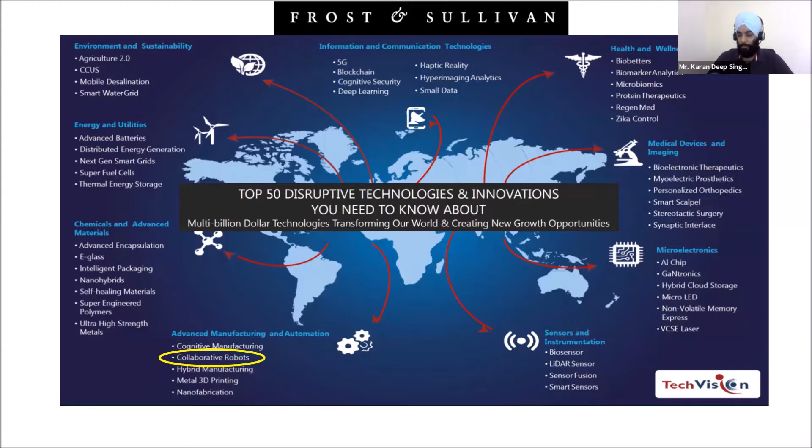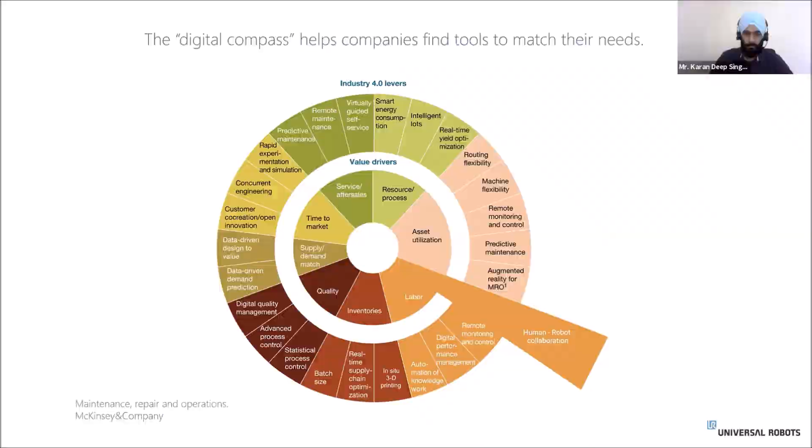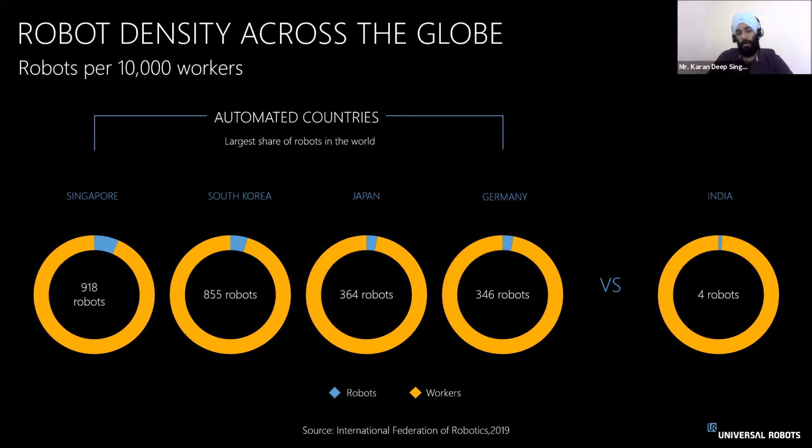South Korea is 855, Japan with 364, and Germany with 346. But if you compare with the India manufacturing scenario, it's only 4 robots per 10,000 workers. So we are way behind in the implementation of industrial robots or collaborative robots. But now governments are giving initiative to AI and robotics, and maybe in coming years this number will increase significantly, and manufacturing facilities can make use of more robots and cobots together to meet the demands of manufacturing.

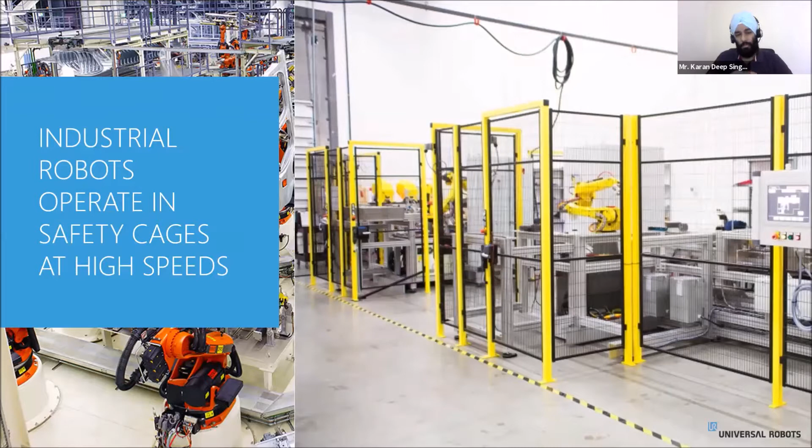There are two slides which are very important here. If you see industrial robots, they work inside cages. If you want to change something inside the cell, you have to open the door, go inside, and stop the line, which will ultimately reduce production. It will halt production, and at the end of the day, you will not be able to meet customer demands.

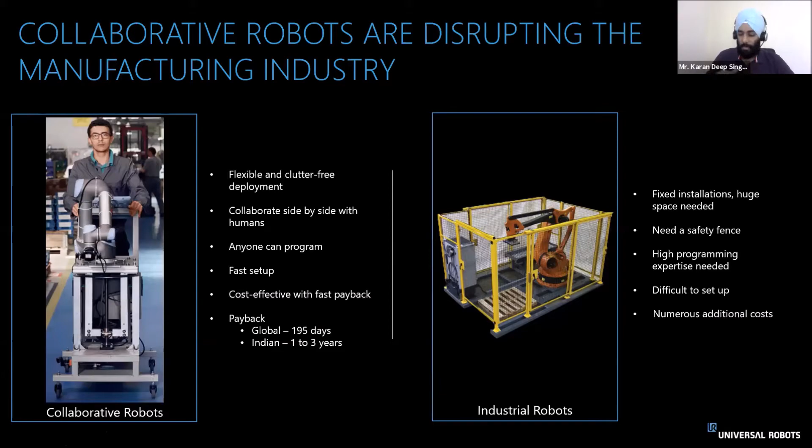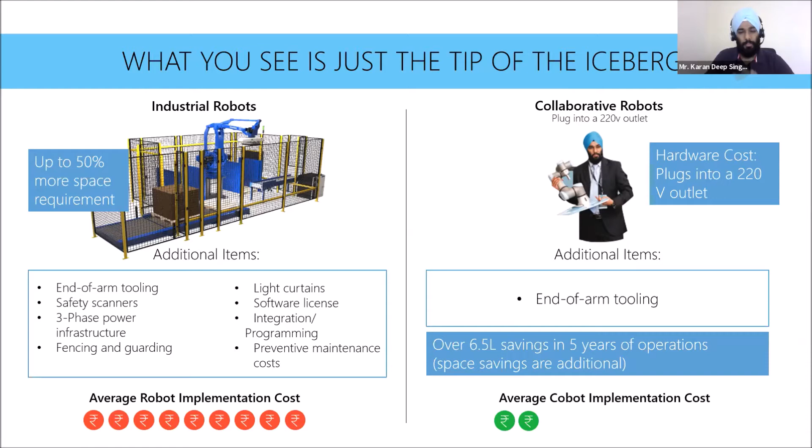Only thing what we sell is the extended warranty for maximum 4 years. So end customers can buy extended warranty for 4 years in one shot. If they buy a robot today, they can buy a 4-year warranty, or they can buy every year before the expiry of the current warranty terms. So this is our offering in terms of the commercial point of view.

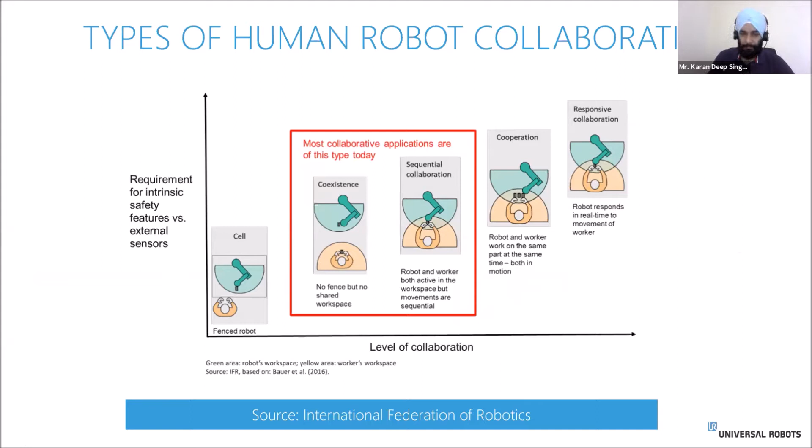This is a standard designed by ISO, technical specification 15066, which states that anyone making a collaborative robot can have any of the safety features: a safety-rated monitored stop, hand guiding, speed and separation monitoring, and power and force limiting.

But in UR cobots, these 4 features are available by default. You can use them as and when required. Power and force limiting is inherent in the design, meaning that if you apply any external force, whether from a human operator or another device like a conveyor, it drops the current in the system and stops. So without damaging parts or hurting the operator, it's safe to operate without cages.

There is a whole document on this, a 30-page document which you can download from the ISO website, where you can learn more about this technical specification.

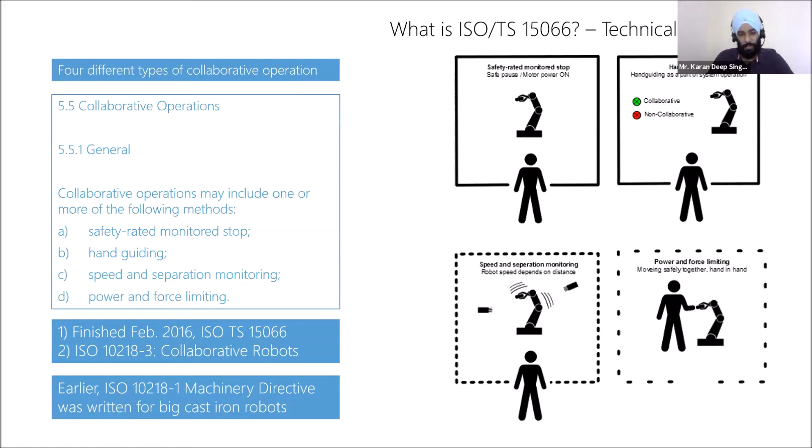On the product line, we sell 2 different product lines: the CB3 and the E-Series family, which we launched in 2018. The CB3 has 3 different models: UR3, UR5, and UR10. The numerical number signifies the payload capacity, meaning 3 kg, 5 kg, and 10 kg, each with different reach for operation. In the E-Series, we have 4 different models: 3E, 5E, 16E, and 10E.

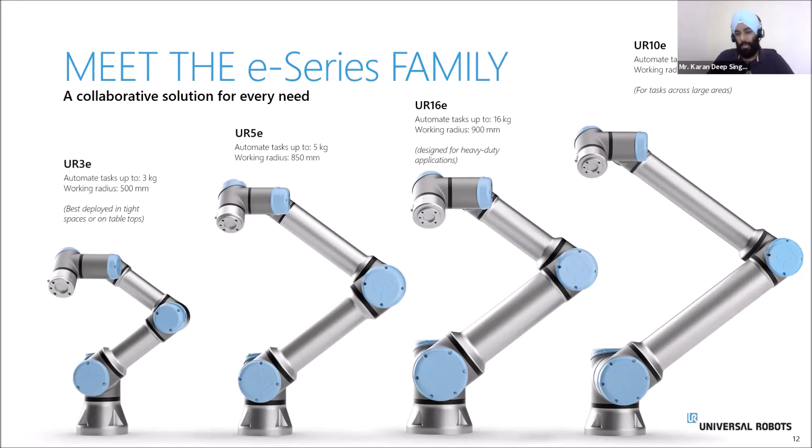You may wonder why we put 16E in between 5E and 10E, because of the reach. It's a simple phenomenon: if you reduce the arm length, you can lift a heavier product. The arm reach for the 16E is 900 mm, clearly designed for heavy duty applications which were not possible before. If you have a box of 11 or 12 kilograms, you were unable to lift it, but now with 16E you can do that heavy machine tending or heavy palletizing applications.

Industry 1.0 to 5.0: in the earlier years we had mechanical, water and steam engines. Then we moved to mass production and assembly lines. Then we came to robotic automation and computers. And now we are talking about Industry 4.0, which is putting everything on a network so we can collect everything on a digitized basis.

But what the company talks about is Industry 5.0, where we are giving human value creation, meaning humans and robots are working together. The next video, from BMW, will make clear how manufacturing is using collaborative robots on their assembly line.

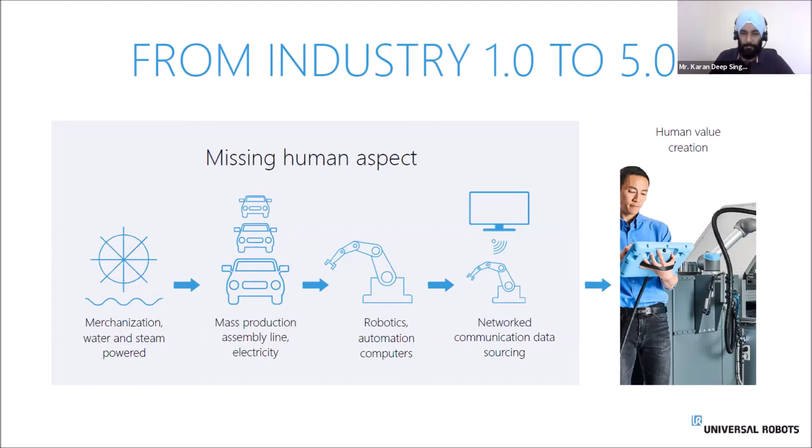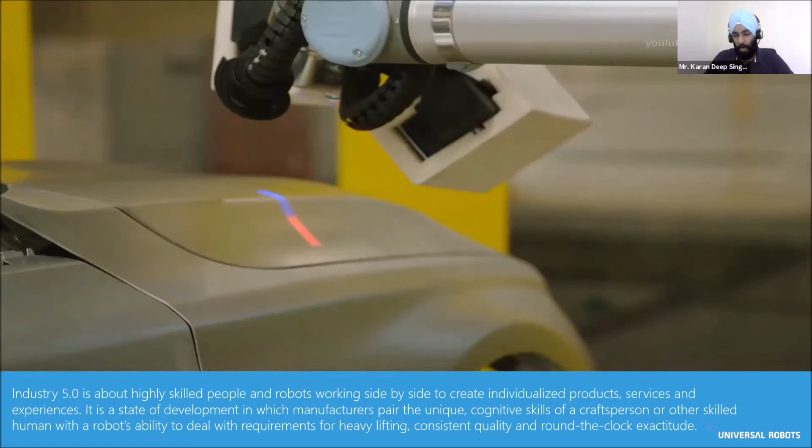It's a tool with competitive advantages through manufacturing excellence. Here you can see it's Industry 5.0, where highly skilled people are required and work with cobots side by side. There are 4 cobots, 2 on each side, doing gap inspection checking on a BMW car, and in between you can see there are no fences, just a laser camera on the robot. It's a UR10, and that's why BMW costs more, because they do a lot of high-end inspections.

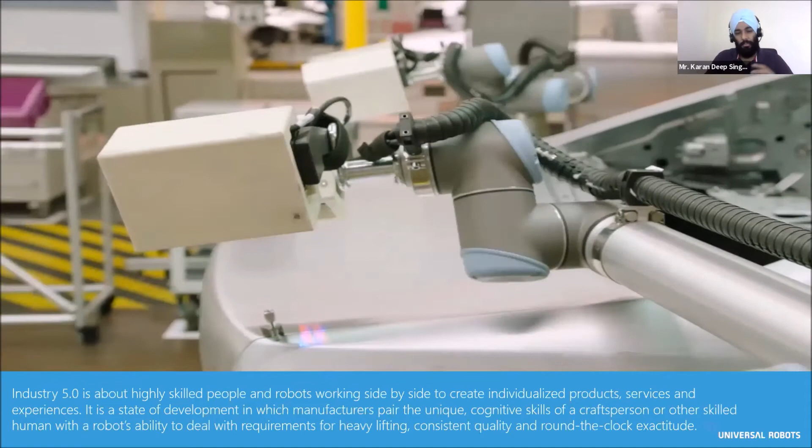You can see a human operator coming in between, doing their own checking without worrying about the collaborative robot working. You can increase the speed; it's running slow because it has to take the picture. When it's done, the data is recorded on the MIS system, and once the car gets all green signals, the next car will come. If it shows anything red, that car goes to rework and is then reloaded for inspection. Here you can see it's all green.

So now it goes for the painting application, the next process. This is how BMW uses it for gap inspection checking, and many other companies are also using it for the same applications.

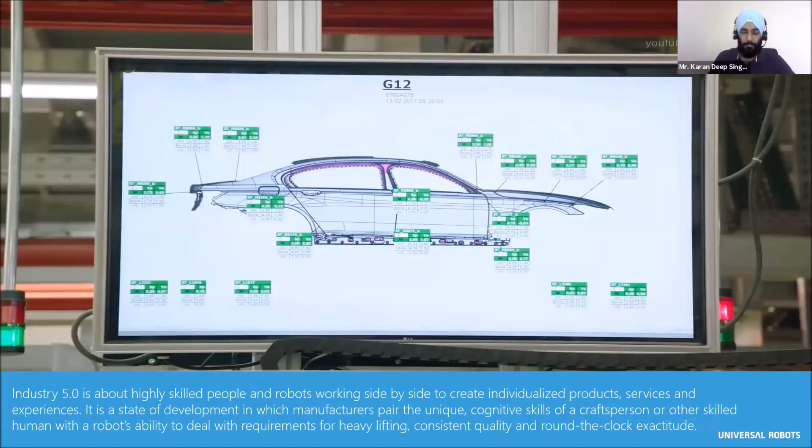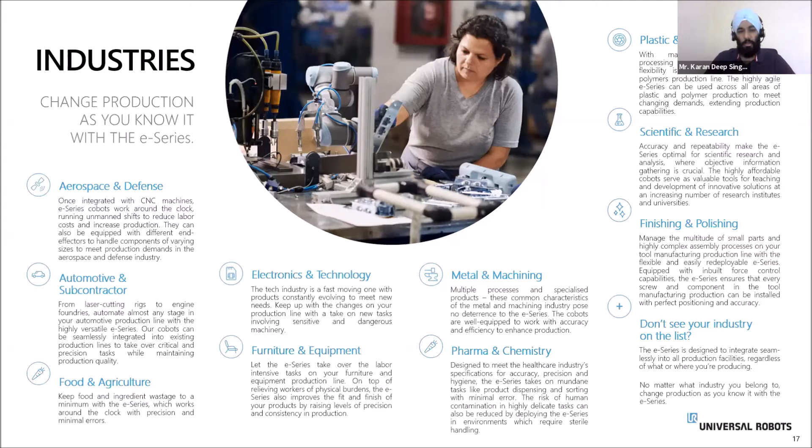So now we talk about Indian case stories. We have bigger clients like Aurolab. They are located in Madurai, which makes intraocular lenses. They installed the first collaborative robot in 2011. They saw it at one exhibition in India, and they deployed one cobot. Before the cobot, they were doing around 270 lenses per day, but today they are doing around 15,000 lenses per day. In 2011, they were supplying only to Aravind Eye Care Hospital in India, but now they are supplying to 150 countries all over the globe.

And they have brought down the cost of a European lens from 3,000 to 270 rupees by using collaborative robots. So they reduced the cost, enhanced the quality of the lens, and started exporting to 150 countries, which is a very great example of how collaborative robots are helping Indian manufacturers.

And this is not a profitable organization. It's a charitable, non-profit organization, and they are using 11 collaborative robots, which are working 24/7, delivering 15,000 lenses per day. This is how they are maintaining the quality.

And the girls who are working there, they are only 10th pass. They only work in Aurolab just before they get married. They just come there for work for some time, and still they are able to run it and program the system. It's so easy, which shows that you don't need a high-level programmer to program it.

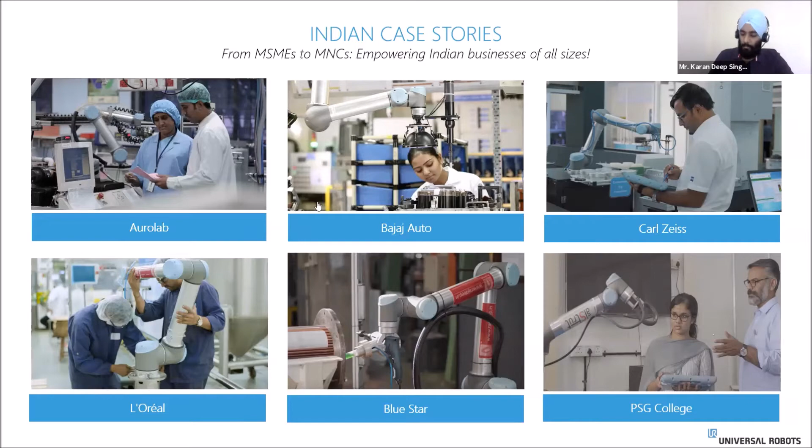On the SMEs front, we are enabling the Make in India dream. We have Shri Sai Makers, Markers and Engravers in Gurgaon. They are a very small company located in Gurgaon, which is supplying to an automotive company. We have SMEW, they make textile winding machines. Shruti Engineers is a 20 employee company, and they have a UR10, which is taking care of machine tending jobs.

Then we have New Engineering in Jamshedpur, and Udyam Dal. They are making dal. They are manufacturers in the agriculture business, and they have a pick and place robot for the packaging line.

Next video is from New Engineering. Audio is not there. You can hear the audio of the video. No. Not really. Okay, so this video is from New Engineering Works.

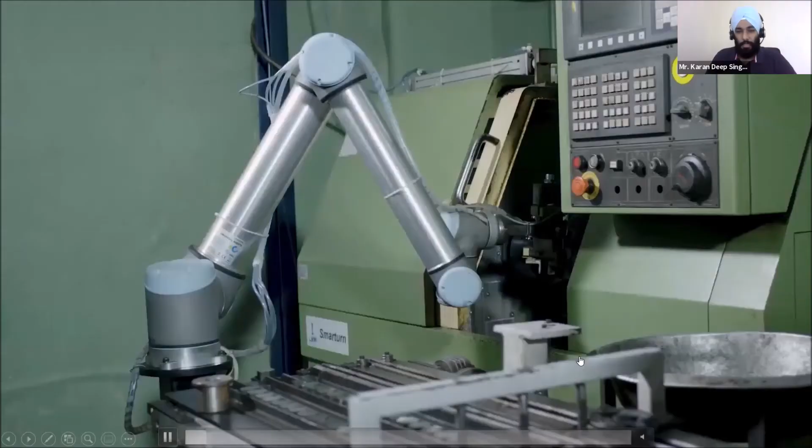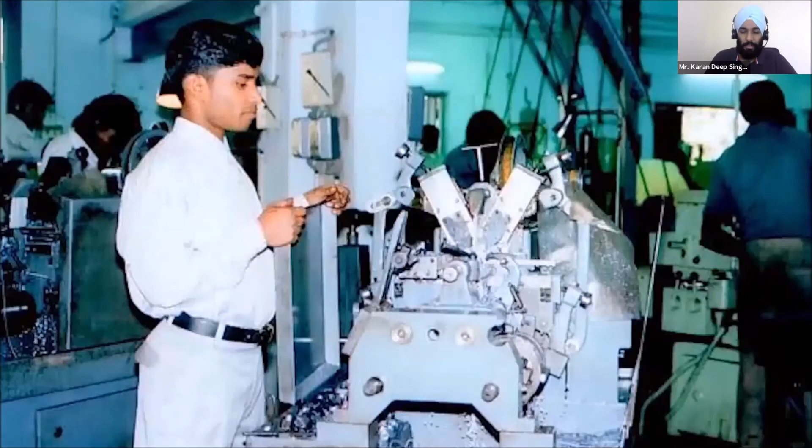They deployed 6 collaborative robots for small part handling. They started this, I think, around 2017 when they installed the first robot. Here the owner is talking that he bought this facility in 1996, and then he learned how to do the in and out of the production. And now they are the world-class manufacturers for Tata in Jamshedpur, and they do parts for commercial vehicles.

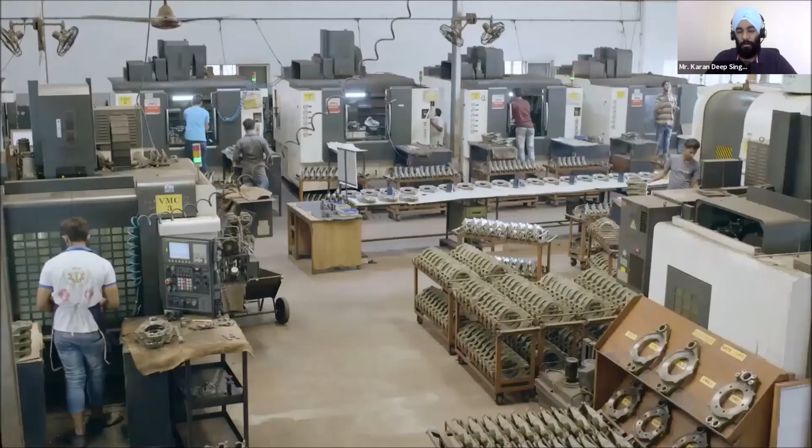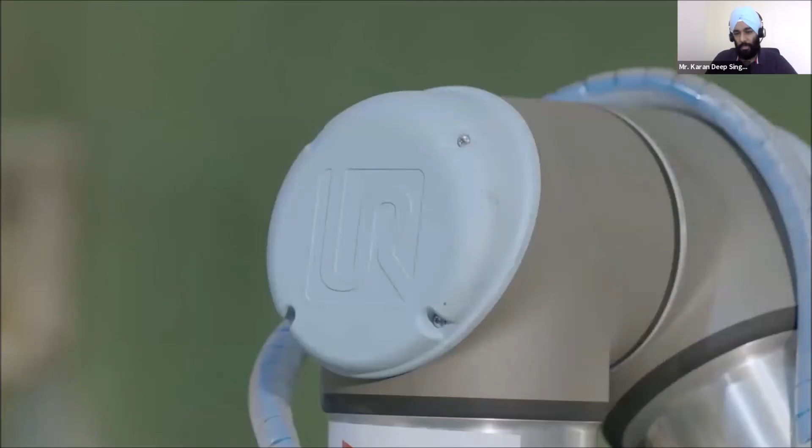And they have a lot of CNC machines, but he talks that if you want to achieve automation, you have to reduce the cost per component so that they can run the line 24/7. And he decided to go with Universal Robots for its lower footprint and easy to program handling.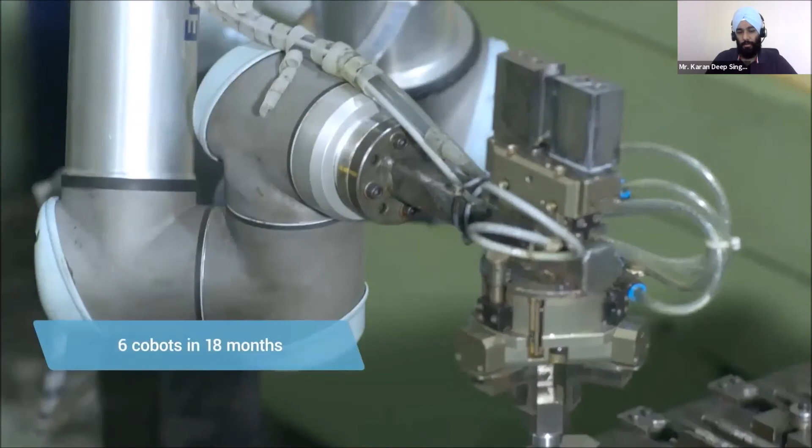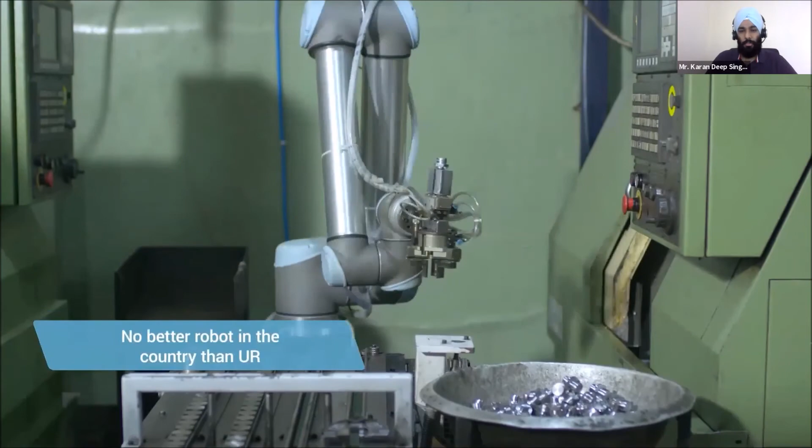And here the robot force works with their employees. As you can see, there are no fences around, and it takes care of 2 machines side by side. They're giving the inspection job of the product which is coming out of the machine. It's still handled by a human operator, and they did not remove a single operator from the line when they installed all the 6 cobots. The team is still there, the labor force is still there, but they upskill their labor performance, not just by loading and unloading, but they have given them inspection jobs and other value added things on the same shop floor.

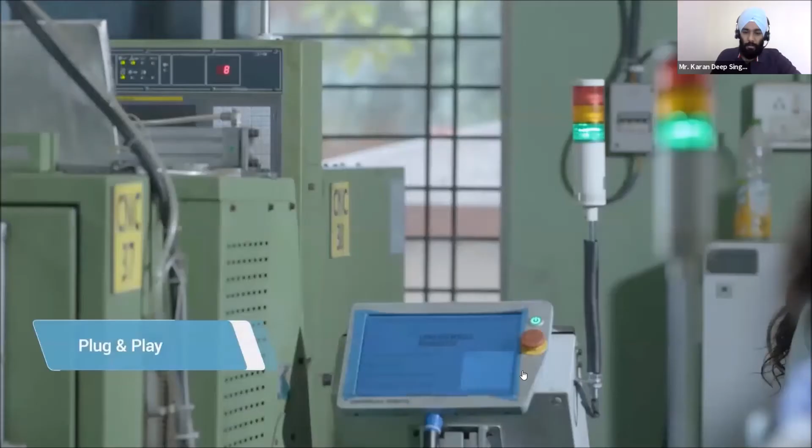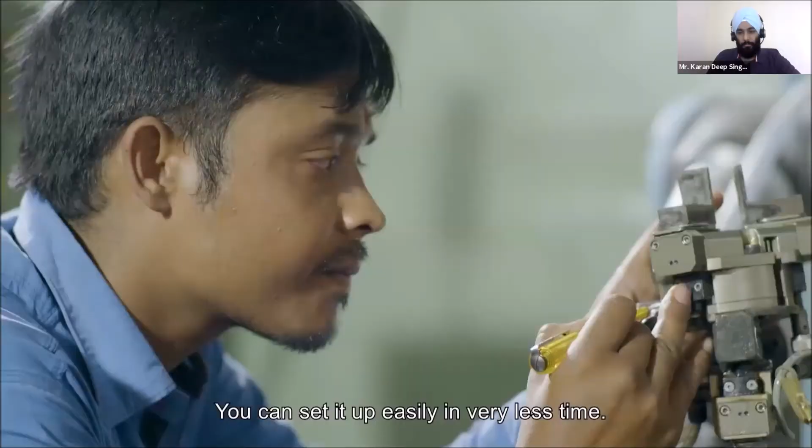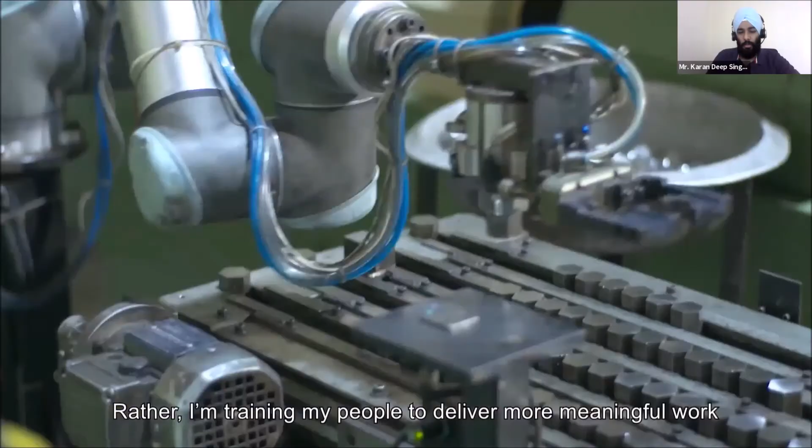It's as easy as using your smartphone for the operation. So he's saying that if we invest in robots today, he's not removing the labor, but they are moving the labor force to do CMM or inspection jobs. He can educate them so that the owner can explore more business.

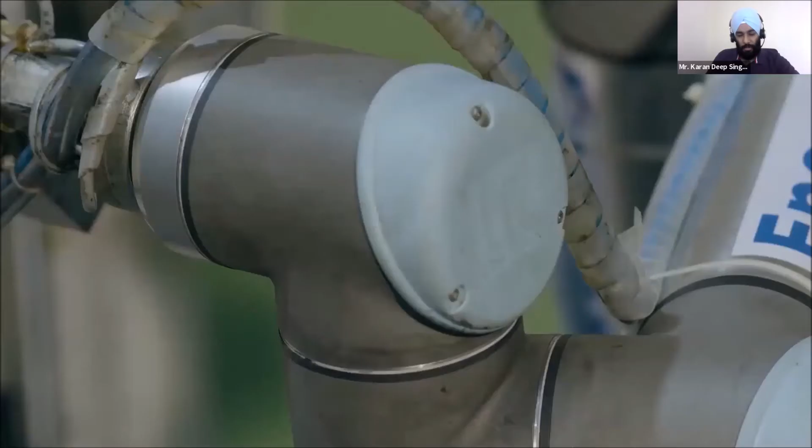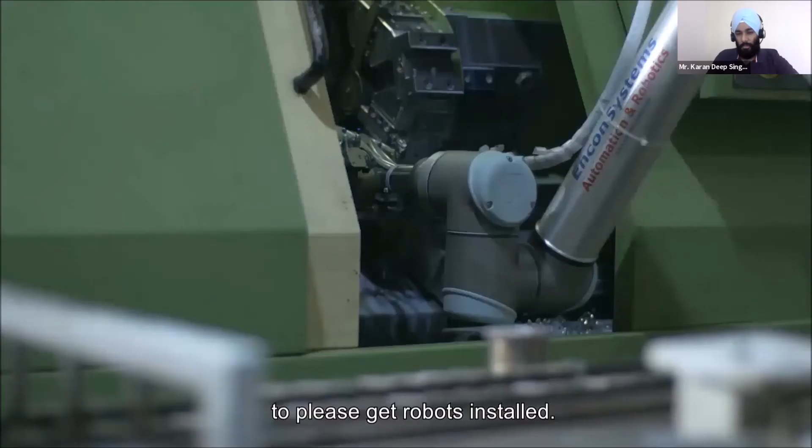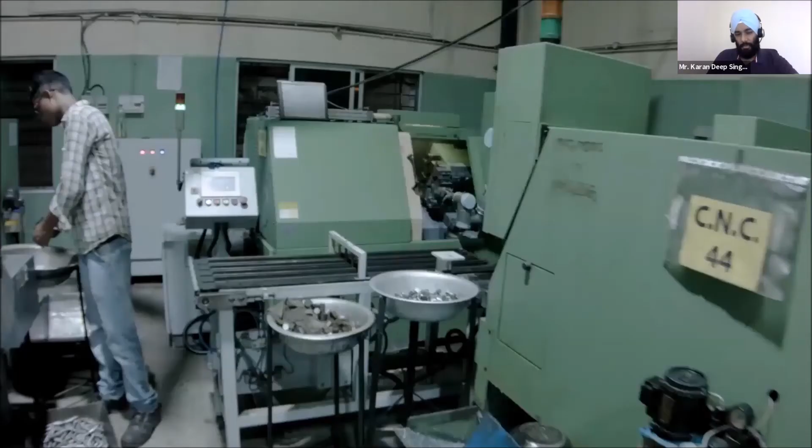He's saying that we have 1,000 SMEs, and he's requesting everyone to think of robots because they can help you with production. They can improve your quality analysis. They can improve your production rates. If you are making 1 or 2 products, it's fine to do labor, but if you're making products in lakhs, then you need automation. You need collaborative robots to take care of your shop floors.

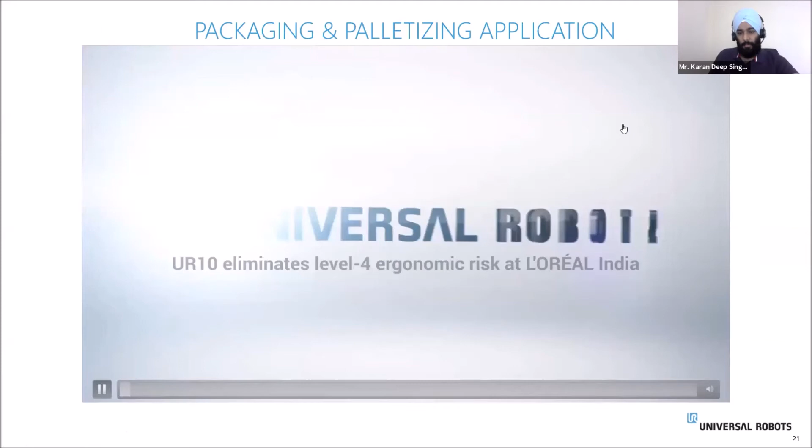The next one is from L'Oreal, which is using it for end of line palletizing application. Here the robot is handling the 8 kg or 9 kg box for end of line palletizing application.

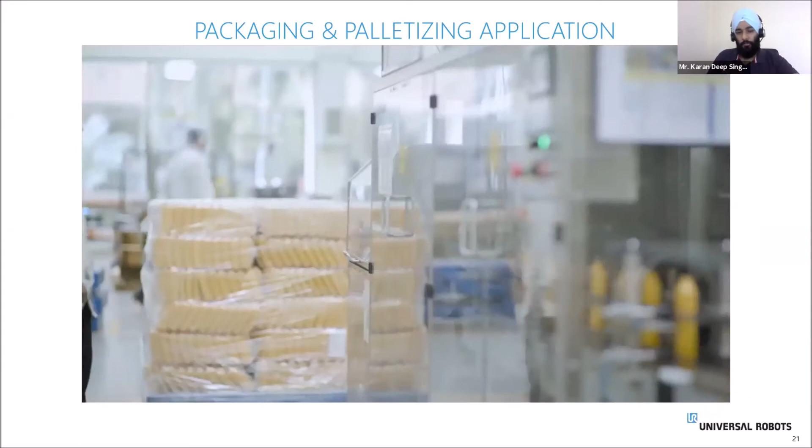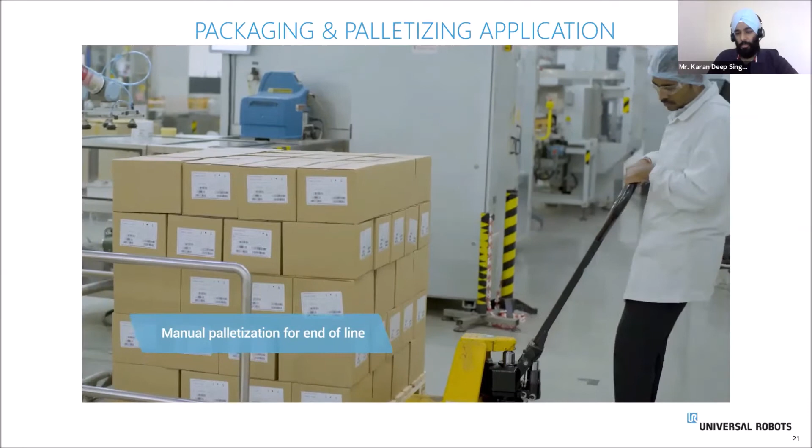The manager is saying it's the highest running line, number 27. L'Oreal did the ergonomics risk analysis, and they found that it's a level 4 risk where the operator was lifting around 8,500 kilograms every day, and they identified that it's a level 4.

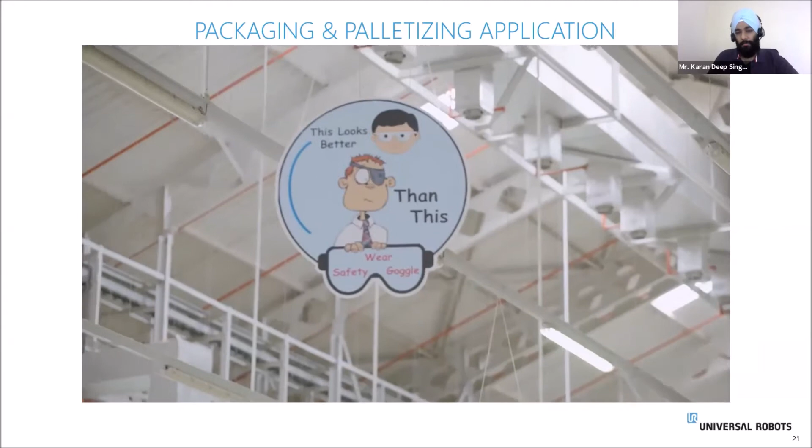So they implemented a Cobot for doing the end of line palletizing application, which runs without the safety fence, and the Cobot can tend 2 pallets at a time. So they have saved around 30 minutes in the pallet changeover. If you save 30 minutes, imagine the productivity increase they got.

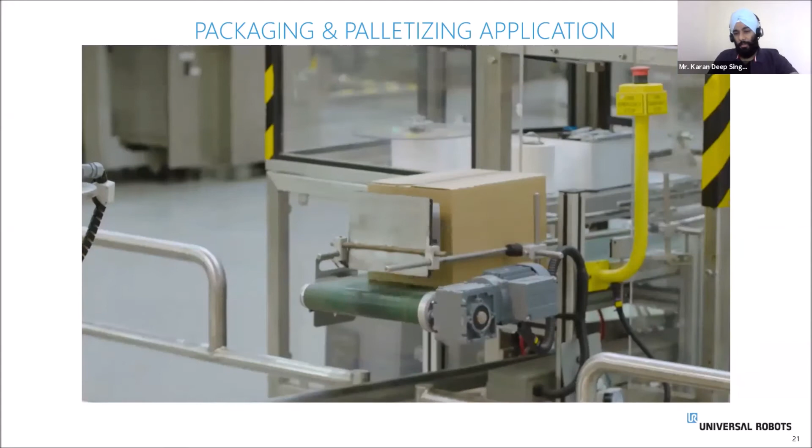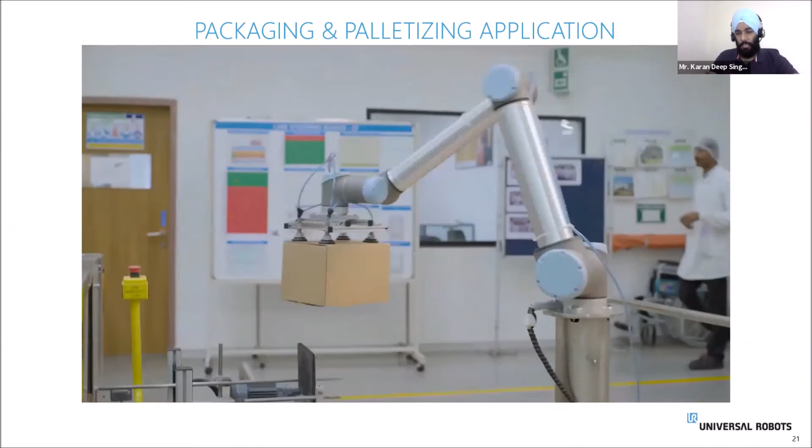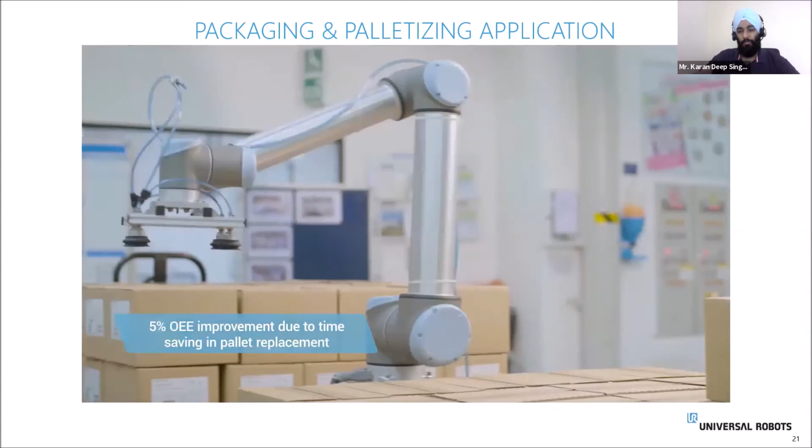The system has been running for the past 2 to 3 years, and they have 2 collaborative robots for similar kind of applications. When their production needs changed, I think in 2018, the line which was running at a higher speed saw demands go low. So they removed the robot from that line and moved the system to another line, and programmed that line and started running the next line.

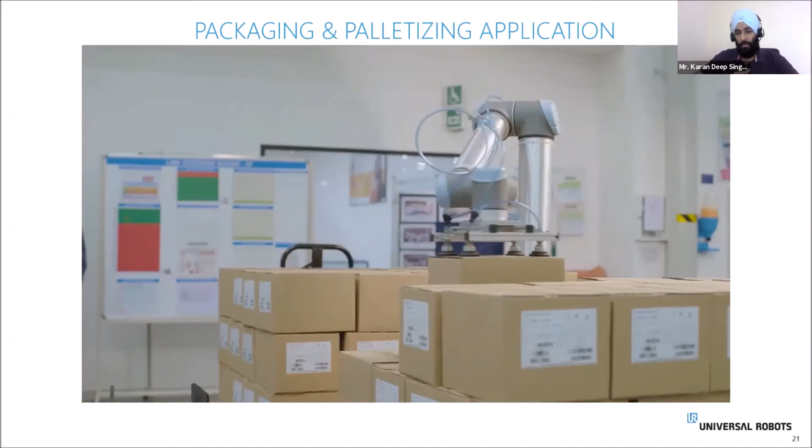So without calling UR or without calling the system integrator, they just moved the robot, programmed it, and started doing that application. So it gives you flexibility on the same shop floor without investing in another robot.

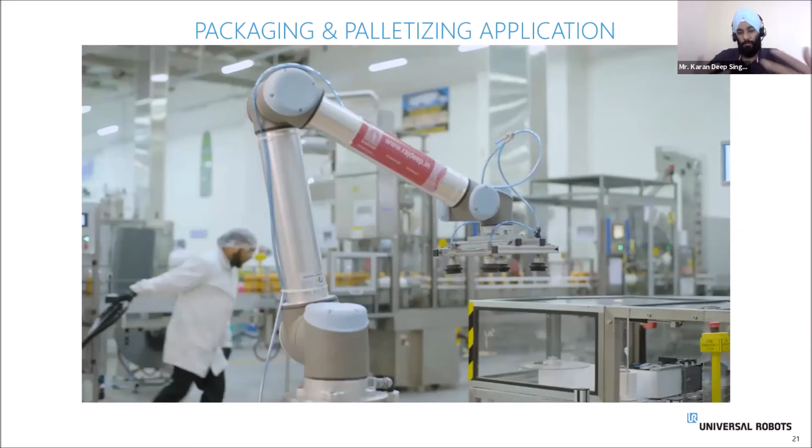So just change the tool. Today you're doing palletizing, you want to do an inspection application, just mount the camera on the robot, it will do inspection. You want to do machine tending, mount a pneumatic gripper, it will start doing machine tending application.

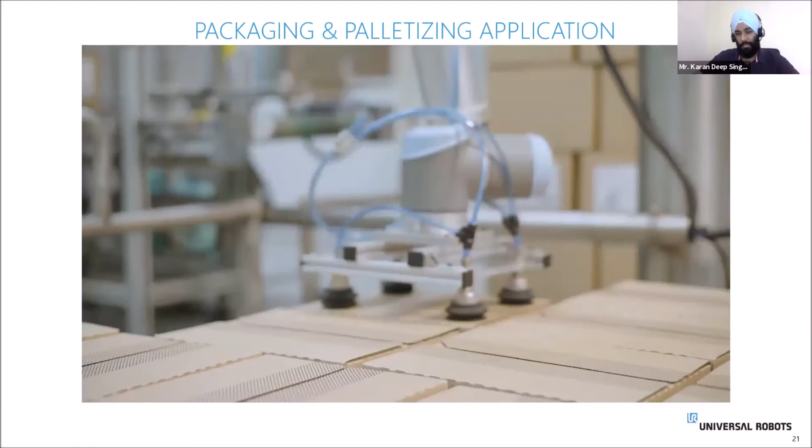Now you can see they are removing the robot and they put it on a trolley. It weighs around 30 kilograms, so you can move it from one place to another place. This is how L'Oreal is using it on their shop floors.

What we also offer is the application builder, which is our online kind of simulation tool where you can select which model you need for your application. You can select the robot model. You can select the tool type.

You need a pneumatic gripper or an electrical gripper. You can decide the tool setup, whether it's a single gripper or a dual. The in-feed, the out-feed, and the interface.

By default, we are giving you digital input and output, which is 16 digital inputs and outputs available with Modbus interface, with Ethernet IP and Profinet as a default system. So you don't have to purchase all this.

You just have, if you're using a Siemens PLC, then connect with Profinet. If you're using Allen Bradley, then connect with Ethernet. If you want to extend your input output, then use a Modbus client or a Modbus server to extend your inputs and outputs.

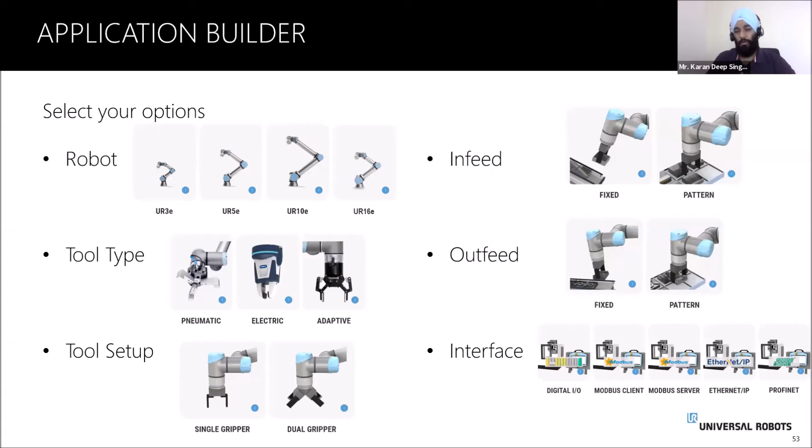If you go to the application builder page, once you fill everything as shown in the last slide, you can see the simulation running on the web page. Once you fill the form on the page, you will get the program, you will get the layout, you will get the packages, which will include the tips for interfacing.

So it's like a do-it-yourself concept. Then again, you don't need a UR, you don't need an integrator. Just buy the robot, connect the gripper because you know your product better, and then start doing the application.

So this will significantly reduce the downtime. It will significantly reduce the ROI factor, and you can implement more and more collaborative robots on your shop floor.

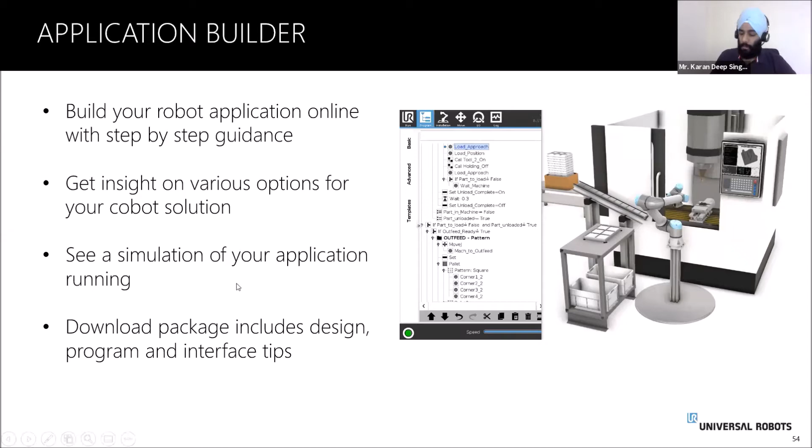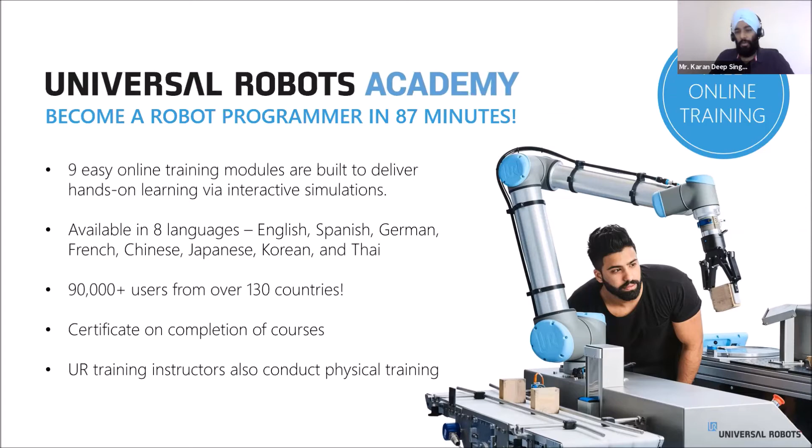And if you need more knowledge, then we also do in-class training for 2 or 3 days, where you can learn the high-level programming on the collaborative robots, which will help you in deploying the cobots on the shop floor.

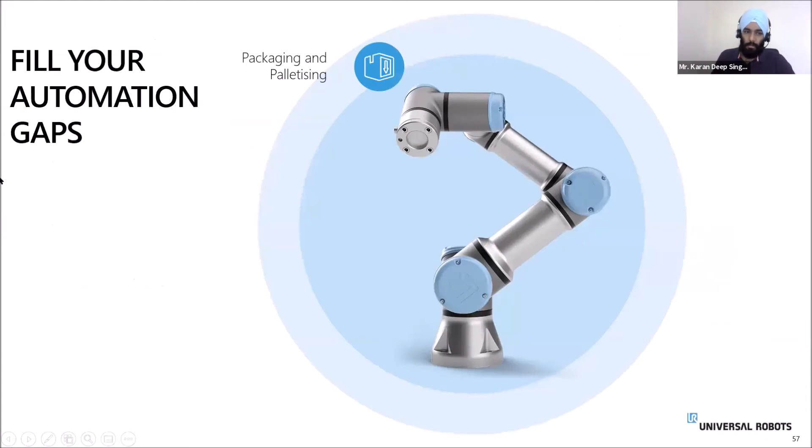So fill your automation gaps. What all applications you can tend using UR cobots?

You can do packaging and palletizing, glue dispensing, and injection molding. We are giving Euromap 67, which is a European standard for plastic industry machineries. It's a separate module which you can buy as an optional. If your injection molding machine has a Euromap 67 interface, just connect that module and you are up and go. It's just a plug and play device.

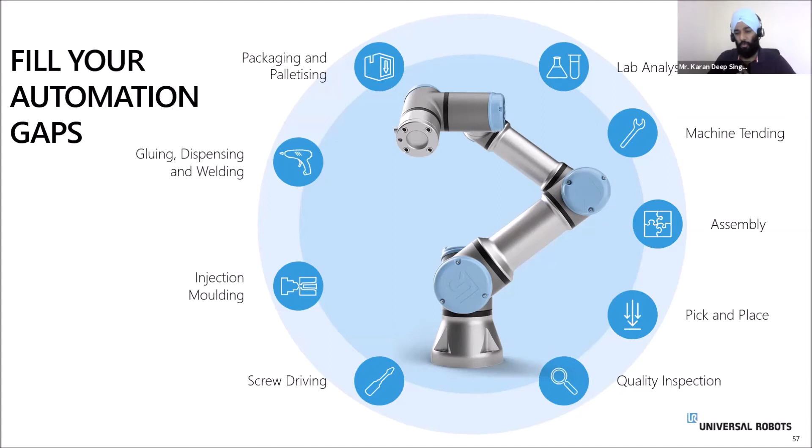You can do assembly jobs like screw driving, quality inspection, and machine tending applications. So many applications just using a single arm. Just by changing the tool, you can tend so many applications on your shop floors.

The next is quick deployment or flexible redeployment. Within half a day, you can move a cobot from one place to another and start doing your production. So if you have a manufacturing facility doing high mix, low volume, then I think collaborative robots is the best suitable product currently in the market, which can help you maintain the demands of the customer and your productivity and output.

Partial automation, what we believe is do a partial automation, because 100% automation is always costly. If you bring in a dispensing station, a sealing taping machine, a shrink wrapping machine, then your project cost will go high and your ROI will never come. So partial automation always helps - give 80% task on the cobot and 20% on the human operator, which will add value to the process.

And then we have democratized automation by lowering the barrier of automation. Cobots can be easily deployed by any large, small, or medium manufacturer alike.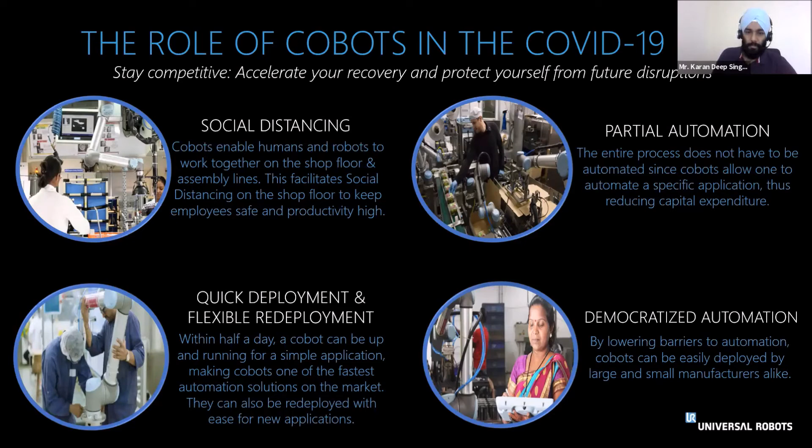Thank you. If you have any questions, attendees can ask, or maybe the other panelists can ask me.

So, Mr. Karandeep, it was a really informative session, good presentation. I think all the attendees must have got a good insight of this topic. So basically, there are 5 important things if someone wants to go for the cobot. There is a very fast setup, then it's very easy to program. It's quite collaborative, it's also very safe - even the human aspect is inbuilt in this, so it's very safe. Its deployment is very flexible - that is another important area we could get. And the payback, of course, what you have just touched upon, is a very cost efficient, very cost effective solution.

So I think we have got a few questions which we will try to address. The first question which has come from a participant is that cobots reduce manpower dependency and get speedy and consistent output - at what cost in fluctuating demands? So could you answer this?

So here we see an example of flexible automation, where the same cobot can be used in multiple applications, meeting demand fluctuations. If you're doing a high mix, low volume scenario, cobots can help you meet that demand and match the speedy and consistent output. So a flexible redeployment feature can help reduce man dependency, but it can also take care of the demand fluctuations.